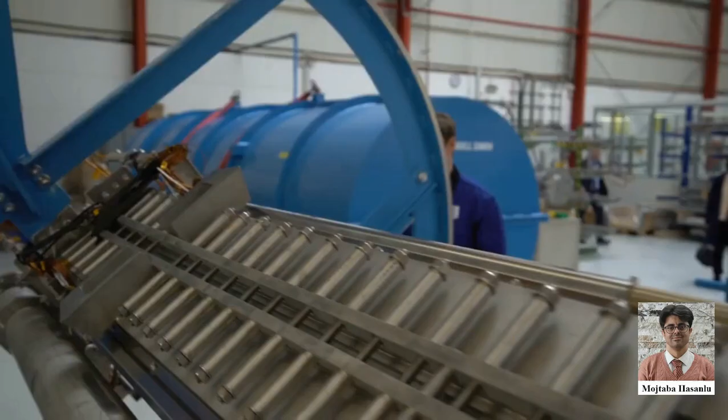While others talk about the future, we are working on it. Since 1824, Bilfinger Noell has been mastering the ever-changing challenges of our time with state-of-the-art technologies. We are a world-renowned company that focuses on building high-tech specialized machines and systems. One of the latest innovations: intelligent structural health monitoring for permanent safety monitoring of bridges.

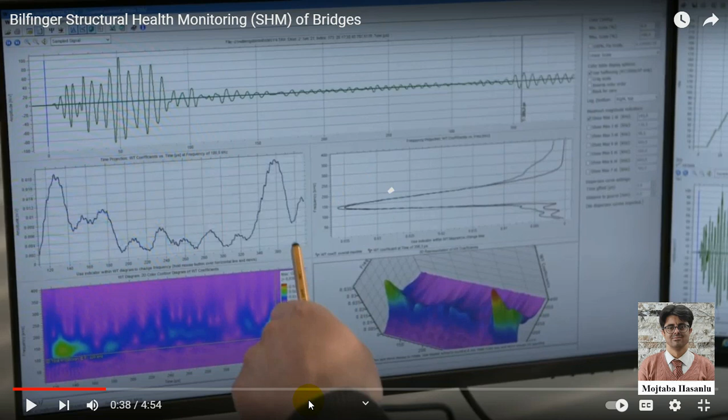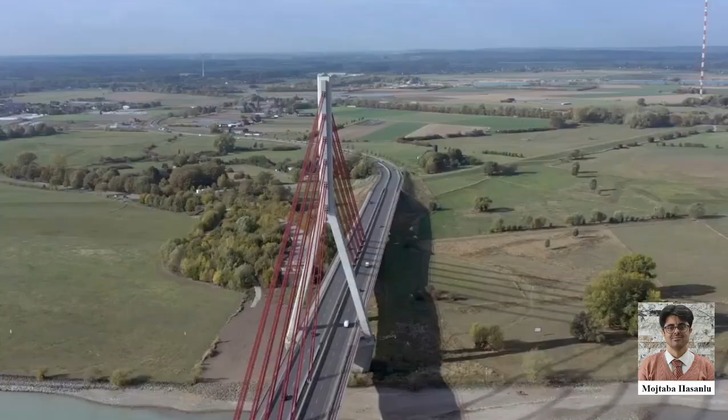Germany has around 40,000 highway bridges. About 1 out of 8 is approaching the end of its originally planned service life. It often takes years to build a new bridge. Until then, traffic authorities have to strengthen monitoring and maintenance activities.

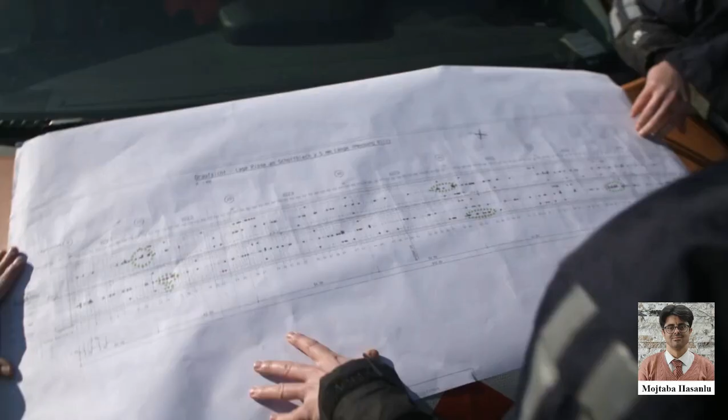Hessen Mobil, the operator of the Tal-Albach Bridge, approached us with the task to non-destructively monitor a complex building structure. We accepted the challenge and installed a monitoring system.

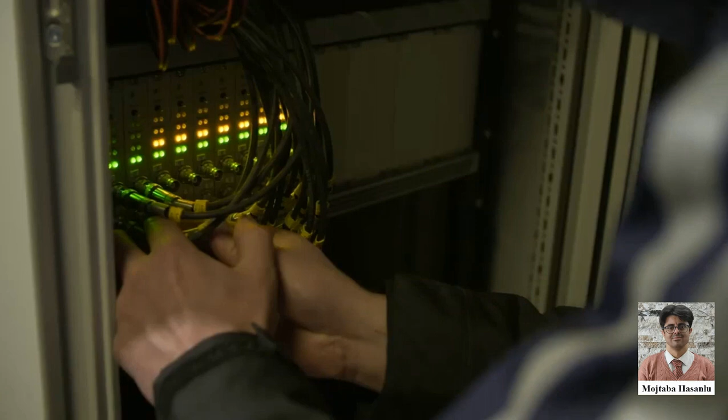An investment that pays off in the long term. After successful commissioning, the Bilfinger Noell Structural Health Monitoring System will now be monitoring the bridge structure for several years to come, reliably and around the clock. The timely detection of damage enables operators to plan maintenance measures ahead.

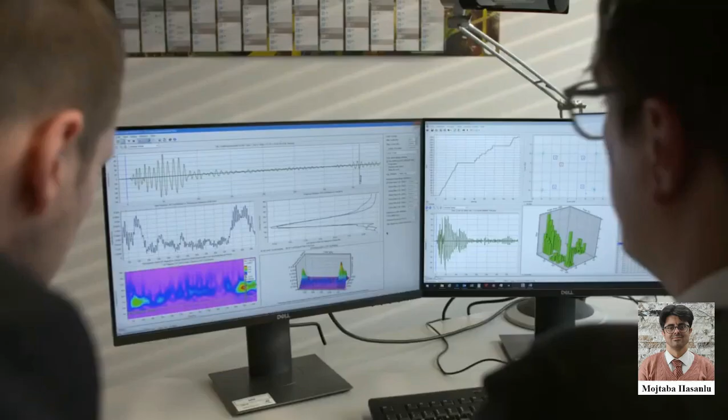In the past, our company had a lot to do with bridge construction. We were founded in 1824. From 1879 to 1979, roughly 100 years, Noell built a lot of bridges, totaling more than 1,000.

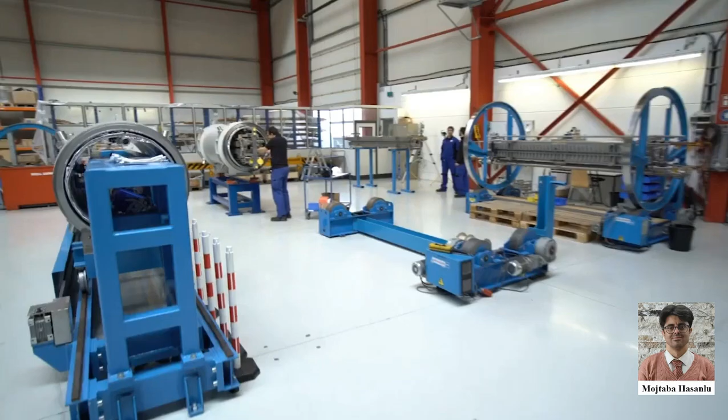We are once again working largely on bridges. By using non-destructive testing technologies, we learn about the condition of bridge structures. A proud history of bridge building, precise materials research, and broad technological expertise. Bilfinger Noell has acquired unique know-how and an extensive knowledge base, a stable foundation for applying the state-of-the-art bridge monitoring system.

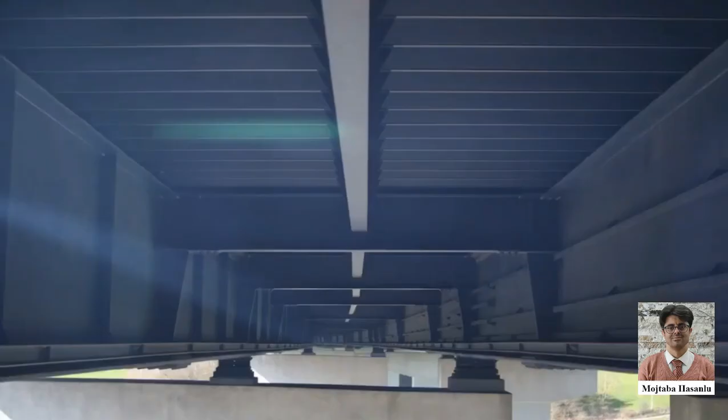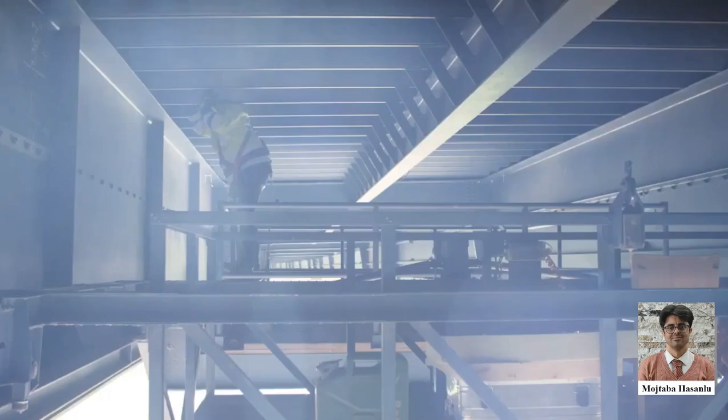Conventional bridge inspections are visual inspections. The inspector has to check each weld seam individually. In addition, the conventional visual inspection only records the current status.

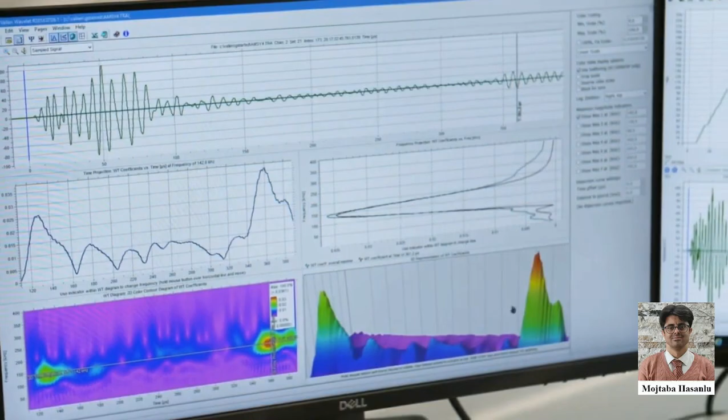Huge amounts of data are analyzed, interpreted, and visualized right when they are created, enabling traffic authorities to make the right decisions.

The great thing is that we can connect to the system, such as a bridge or a machine, without having to interrupt the process. We can listen passively, so to speak.

It is clear that there will be further applications for other types of bridges, railway bridges, highway bridges, and so on. It will also cover tunnels, other building structures, and of course we can also listen to machines and other possible things.

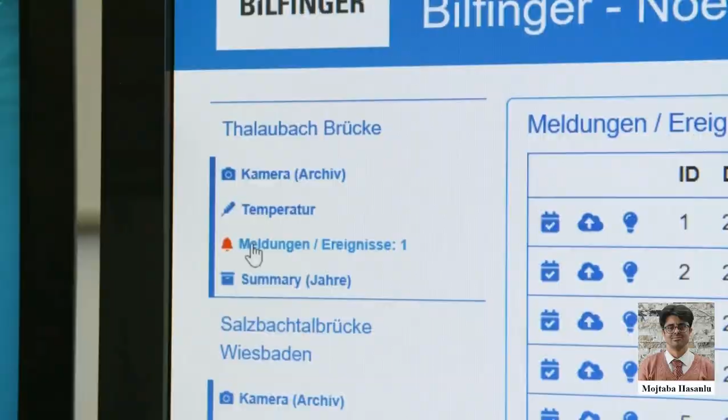Road users and operators benefit in every aspect, whether from a safe extension of the service life of the bridge, the strategic planning of the maintenance work, and thus reducing traffic restrictions, or the system's alarm feature. All this is part of a monitoring system that does not require any complicated structural adaptations. A real improvement for bridge operators, thanks to Bilfinger-Noell's structural health monitoring.

I'm Mahadevan, the John R. Murray Senior Professor of Engineering here at Vanderbilt.

Obviously, if you're concerned about reliability and risk analysis, it's not just a one-time thing at the beginning of the life of the system, but it's something that you...

Let's face it, the way we keep track of our health these days is kind of like driving a car whose dashboard only works 1 hour a year. That is literally the model of the annual checkup. Even Star Trek saw a better way over 50 years ago: pervasive, comprehensive monitoring of what's really going on with you right now. We're on the cusp of that.

The Omron Heart Guide is the FDA's first ever approved blood pressure machine that fits around your wrist. It's in its final FDA approval phase right now, going to market end of 2018. No prescription required.

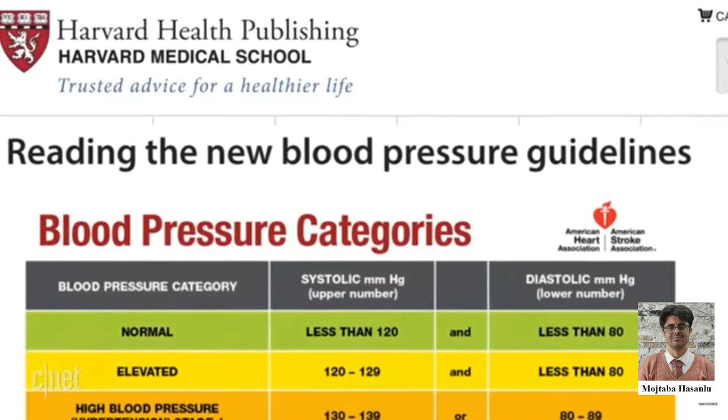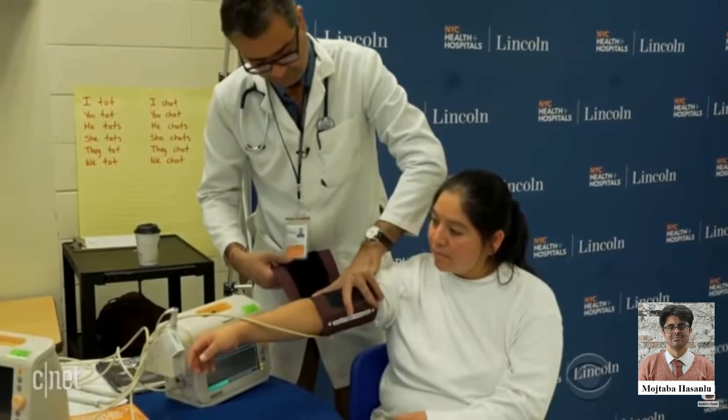New blood pressure guidelines issued in late 2017 now mean that 46% of Americans have high blood pressure, according to the American Heart Association. That's up from 32% under the old, decades-old standard. The maladies high blood pressure leads to are almost too numerous to count, but they don't call it the silent killer just to be dramatic. That should tell you something.

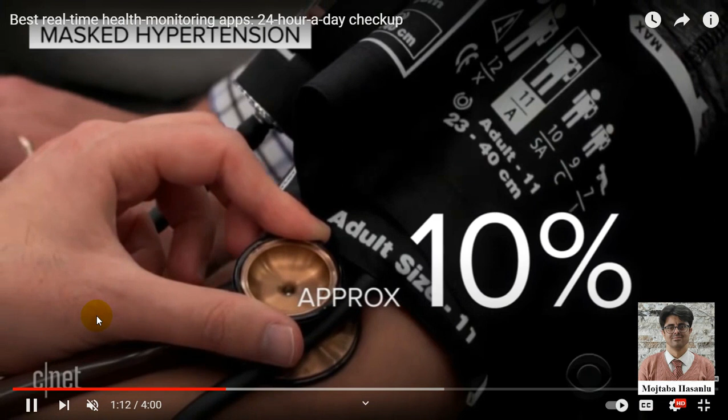The rest of the time, only constant monitoring can suss these two out.

Now let's turn to a little bit of sugar. The Dexcom G6 is the latest of continuous glucose monitors, knowing what your blood sugar levels are all the time. You wear it for 10 days at a time and simply swipe your smartphone or a small dedicated reader over the thing to check or record your glucose momentarily, to build a history, or to alert family, friends, or clinicians about a crisis level you might be in. The Medtronic Guardian Connect and the Abbott Freestyle Libre round out this hot category, and all are aimed at the idea that non-diabetics will one day wear something like this to avoid becoming type 2 diabetics.

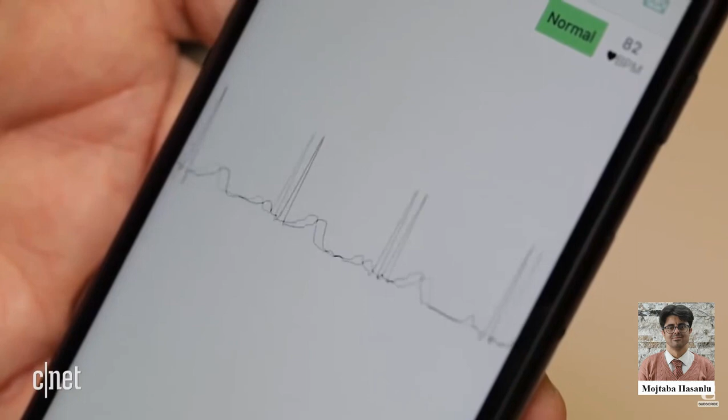Now, check out the AliveCor KardiaBand, a band for an Apple Watch, but it's actually a wrist-worn electrocardiogram machine. It's specifically designed to detect atrial fibrillation. That's when your heart kind of flutters instead of beating smoothly. And it's a key contributor to the future risk of stroke. This band is said to be about 87% accurate at detecting AFib. And like other products we've looked at, it's FDA cleared.

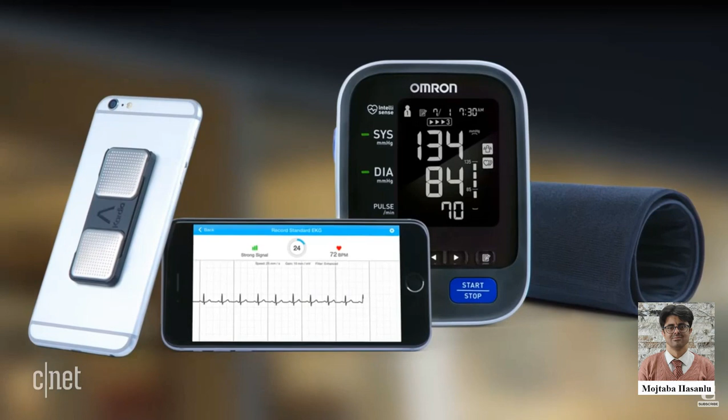AliveCor and Omron, who we just saw, work together. Their products can already create a single channel of information about your heart health for you or the clinician who would like to see it when something is outside the realm of normal.

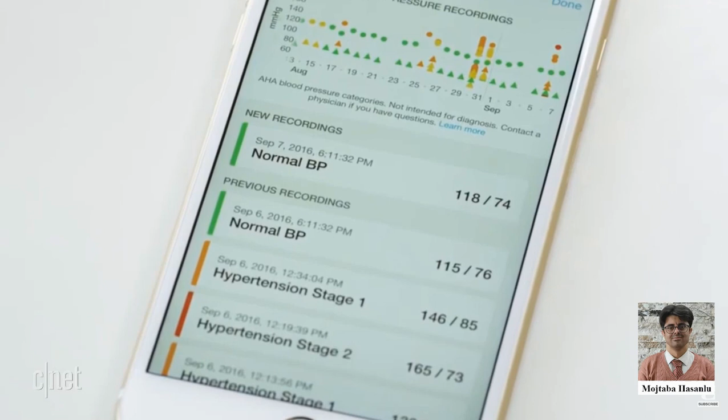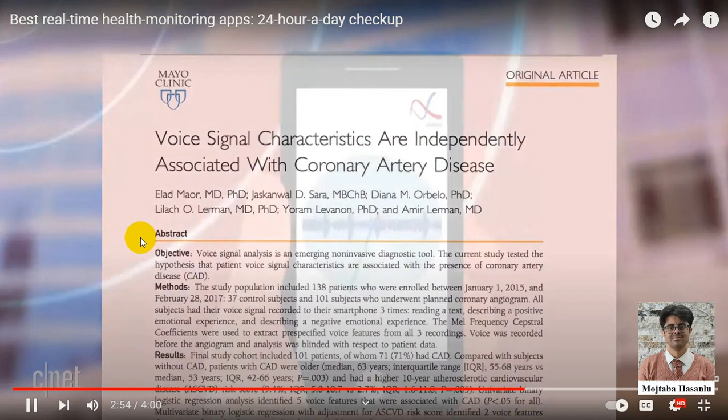Evidence suggests that your voice may be an accurate indicator of whether you have coronary artery disease. 81 tonal features of voice were measured after patients spoke to a recording app using technology from a vocal biomarker company called Beyond Verbal. Upon further confirmation, this study could open the door to you monitoring your circulatory system by just talking.

Where does all this go next? First, these devices need to give us answers, not just information, and answers that motivate rather than overwhelm or discourage us. Secondly, it'd be great to have a single dashboard of our health from many sensors, hopefully without us having to wear many devices. Third, make these technologies over-the-counter so we can wear them long before we supposedly need them. This does, however, set up some tension between devices that keep us well and pharmaceuticals that fix us when we're not. And fourth, recognize that everything is a health signal, from your smart home devices to your social graph.

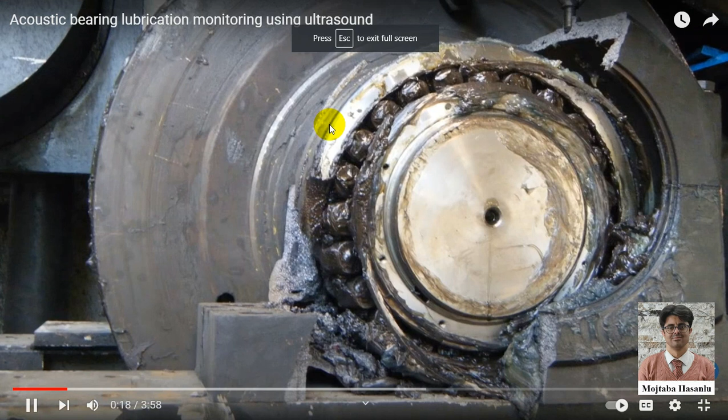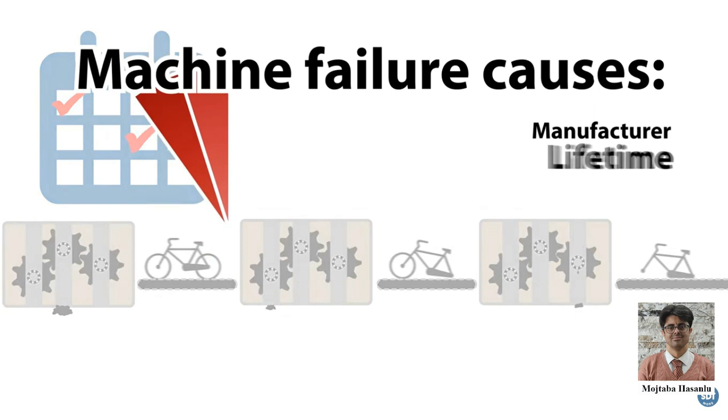Ignore simple concepts like appropriate lubrication and pay consequences that undermine your competitive advantage. Poorly lubricated bearings are a primary contributor of premature machinery failure. A common mistake is to grease bearings based on time intervals instead of condition. This wastes time and lubricant and contributes to over-lubrication. Major bearing manufacturers claim that incorrect lubrication practices decrease the longevity of bearings by as much as 40%.

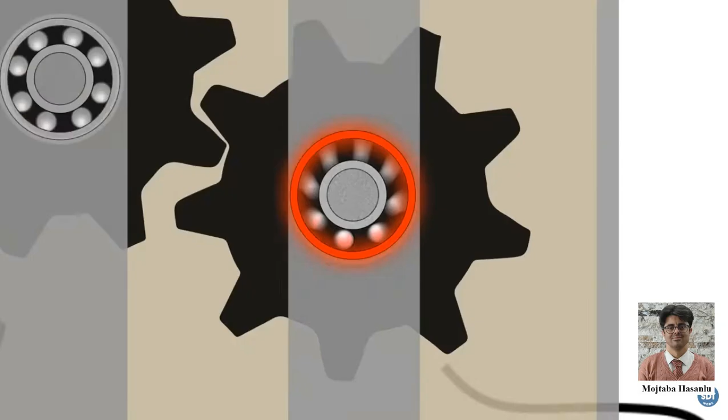Grease serves a simple purpose: to reduce friction and dissipate heat. Too much lubricant builds pressure inside the bearings. Too little creates excessive friction and heat. The result? Bearing fatigue, overheating, failure, and excessive energy consumption.

Companies looking to optimize lubrication practices have adopted a conditional approach. By monitoring the friction levels of bearings with ultrasound, they can determine when the lubricant has deteriorated and needs replacement. Trending against an established decibel value, increased friction levels are quickly spotted and alarms triggered. It becomes a standard practice to sort good bearings from those that require the attention of the lubrication technician.

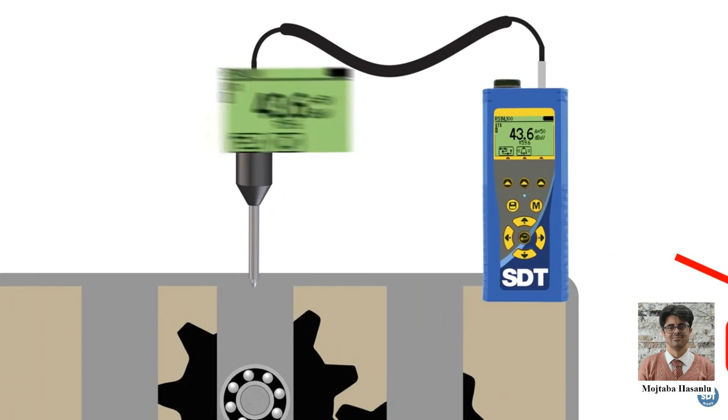Data collection is simple and not time-consuming at all. Diagnosis is straightforward, allowing intervention well in advance of failure. The SDT270 ultrasound detector from SDT serves a dual purpose. In addition to alarming when friction levels need attention, lube techs listen to the bearing as new grease is applied.

Using the SDT270's digital decibel metering as a guide, only enough grease is applied to return the bearing's friction level to normal. One stroke of grease more, and the damage of over-greasing enters the equation. Another common mistake everyone makes.

There are three rules to follow for optimizing bearing lubrication. First, don't grease bearings based on time and service. Grease them because friction levels have started to increase, a sure sign that the lubricant is failing. Don't use listen-only ultrasound devices. Measuring friction levels requires the accuracy and repeatability of the digital SDT270 ultrasonic data collector. Whether predicting greasing intervals or actually applying new lubricant, it depends on the precision of SDT's digital decibel display to avoid over and under lubrication. Are you new to the concept of ultrasound-assisted lubrication?

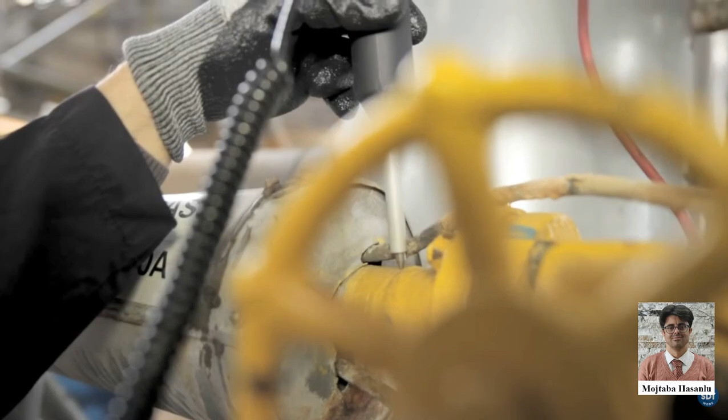There are lots of things you can do with an ultrasound program. Acoustic bearing lubrication monitoring in real time is just the beginning. Our promise to you is that no matter what your ultrasound goals may be, SDT will be right there beside you each and every step of your journey. So what are you waiting for? Let's hear more together today.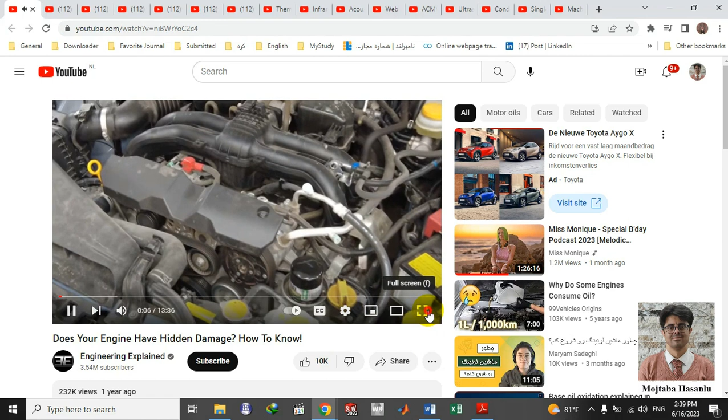How you can determine if your engine has hidden damage. And to do so, I've taken oil samples from my engine after a 3,000-mile road trip. The purpose of this video is to help show what you can learn about your engine and vehicle by having an oil analysis performed. There's actually a surprising amount of information these have, and it even brought up some red flags for my own car.

Now, it's worth mentioning, 3,000 miles is not a lot for modern engine oils. This video isn't about when you should be changing your engine oil. I'd recommend consulting your owner's manual for that information. Instead, we're talking about what we can learn with an oil analysis.

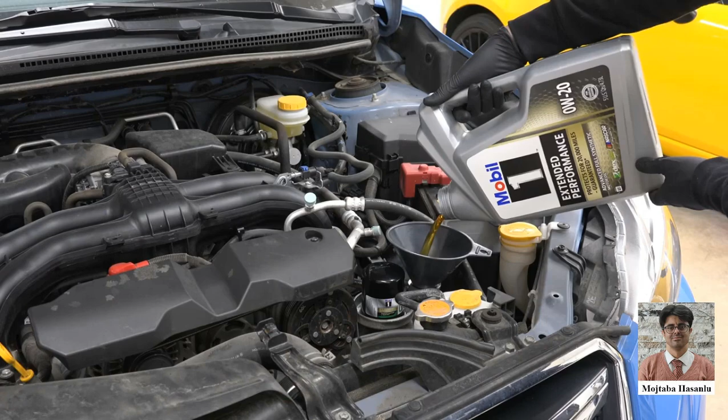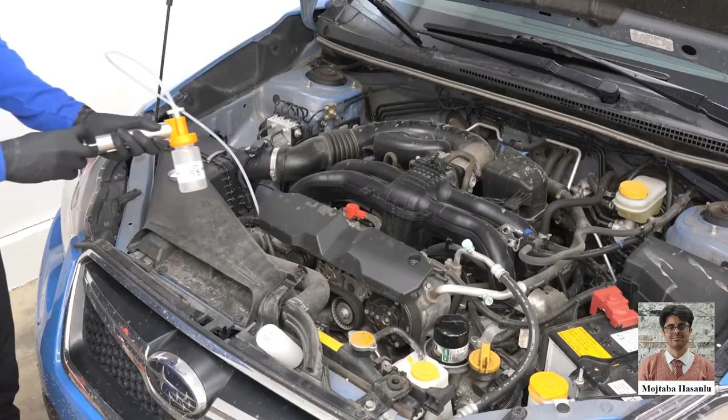So for this test, I took 12 total samples at 3 different intervals for my Crosstrek. We start off with fresh oil right out of the bottle, took a sample of that, then put that oil in after changing the oil in my Crosstrek, let it idle for 15 minutes, and then I took another sample. This makes sure anything that was left behind in that engine, we know what our starting point is with the fresh oil in there. And then after driving 3,000 miles, I took the final sample. So we've got our before and after with these 3 samples.

To get those 3,000 miles, I did a nice scenic road trip and checked out the Grand Tetons as well as Yellowstone National Park, and a bear was kind enough to check in on our mileage count about halfway through. I happily reported to the bear progress was going well.

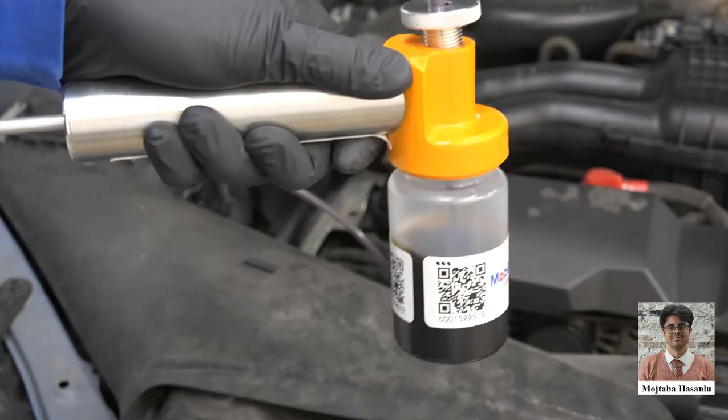So at each of these intervals—new, 15 minutes of idling, and after 3,000 miles—I took 4 samples. I sent out a set of samples to Mobil 1, and because this video is sponsored by Mobil 1, I sent out another set of samples to a third-party lab to independently verify the results. I also took a backup sample at each interval, and that's the samples you see in front of me here, just in case any of these were to get lost in the mail, so I could have another option to send out.

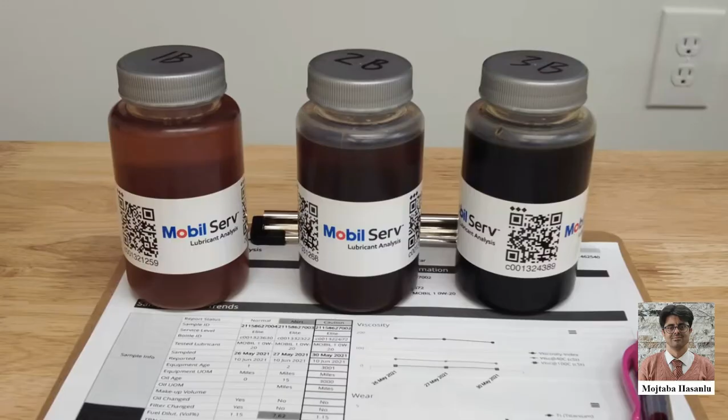So what can we learn from an oil analysis? Well, I spoke with Mobil 1 engineers who manage the oil analysis for large trucking fleets, and they told me how they go through one of these sheets to look at information regarding your engine's health, as well as how much remaining life you have within your engine oil. We'll go through this based on 4 main themes.

First, what's our engine health? Second, what's our oil health? Third, how did the third-party lab results compare? And fourth, what were the red flags that came up for my car? Starting with engine health, Mobil 1 engineers stated the first things they look at on an analysis are the wear and contaminant blocks. Both of these blocks are measured in parts per million, or ppm, meaning the quantity of these metals present out of a sample of 1 million parts.

As we look at the data throughout this video, note that the first column represents the first oil sample, fresh oil, the second column represents the second sample after 15 minutes of idling, and the third column represents the third sample after 3,000 miles of driving.

Worth mentioning, molybdenum is present in the oil itself, so you're looking to see if there's a significant increase. With all the other metals, the starting point is essentially 0, and if you see a significant increase, it can be indicative of certain engine components wearing. For example,

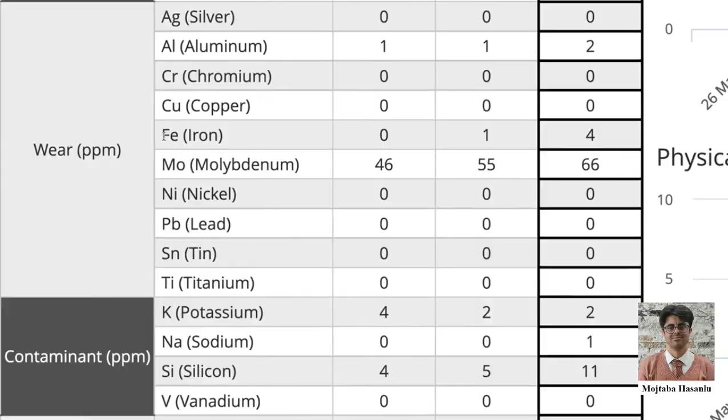a spike in aluminum could mean piston, block, or cylinder head wear. Copper could mean worn bearings, iron could mean worn cylinders, crankshaft, or camshafts, and I've provided a fairly generalized list of what certain metals could mean for how engine components are performing.

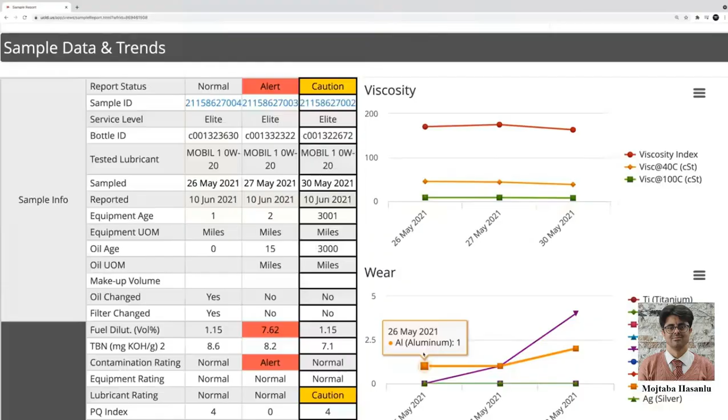The only and very slight increase on wear metals from the Mobil 1 analysis was iron at 4 ppm starting at 0, not enough for it to actually matter yet, and that matches with the third-party results for both aluminum at 2 ppm and iron at 4 ppm after 3,000 miles.

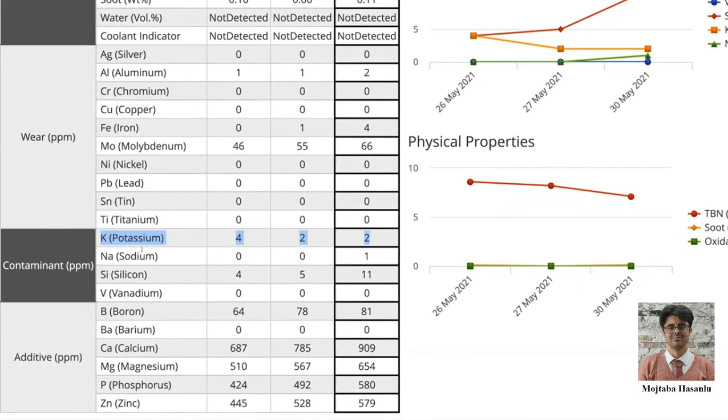Aside from wear metals, the other part of engine health is looking at contaminants. Potassium and sodium can be introduced through the engine coolant. Seeing a noticeable spike here could mean that engine coolant is making its way into the engine oil, and this could be indicative of a head gasket failure.

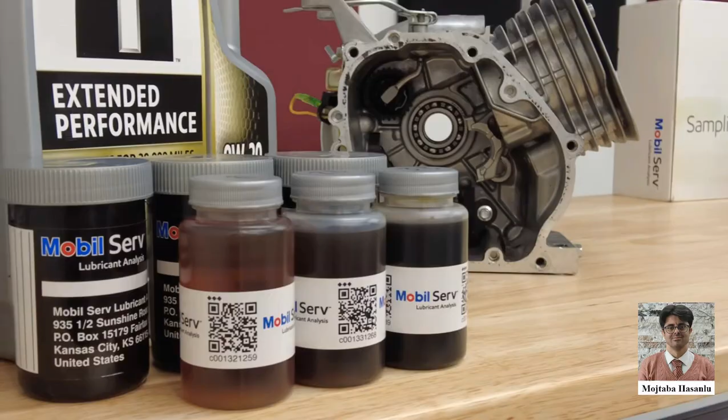Mobil 1 says if this number is over about 75 parts per million, that's when you want to start being concerned. The good news is for my engine, it was well below that.

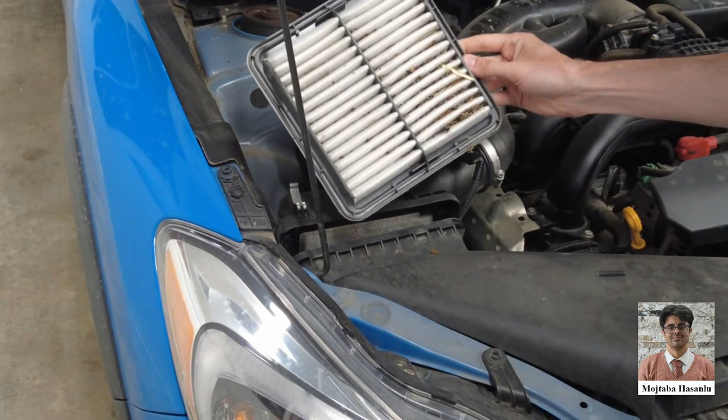Silicon, which will commonly come from sand or dirt ingress into the oil, can help indicate how well the air filter is functioning. This is a particularly important metric to focus on if you're running an aftermarket air filter, which might not filter out contaminants as well as an OE filter.

Silicon is very hard and abrasive, so if you get a significant amount of it in your oil, it starts to chew up your engine internals.

In speaking with a company that operates in the rally space, they said their biggest challenge was finding air filters that could properly hold out dirt from getting in the engine, which then chews up the cylinder liners, you start to get lots of blow-by and oil consumption, and ultimately ruin the engines.

Silicon can also come from RTV, an engine sealant used in assembly.

And finally, regarding engine wear, Mobil 1 reiterated the importance of changing out your oil early on the very first time when you're breaking in that engine, to make sure those initial contaminants and wear metals that are present when the engine is being built are removed quickly and taken out from that initial break-in period.

It's not the synthetic versus conventional debate that's important for break-in, though I use synthetic for my cars, but rather that you change the oil early the first time to remove contaminants from the initial manufacturing and break-in period.

Now that we know the health of our engine, we want to check the health of our oil. So this lets us know whether we can continue using the engine oil or if it needs to be changed out.

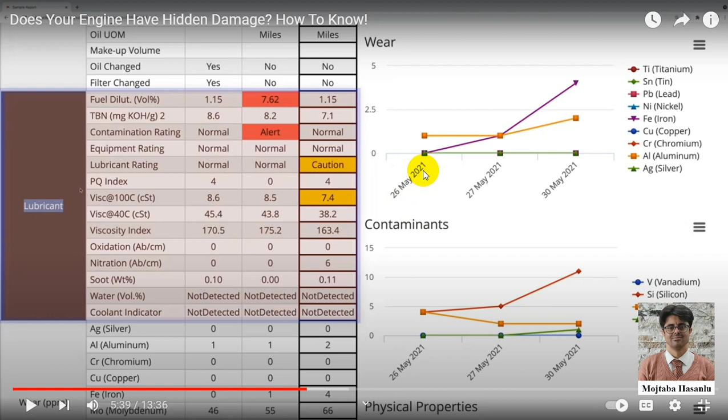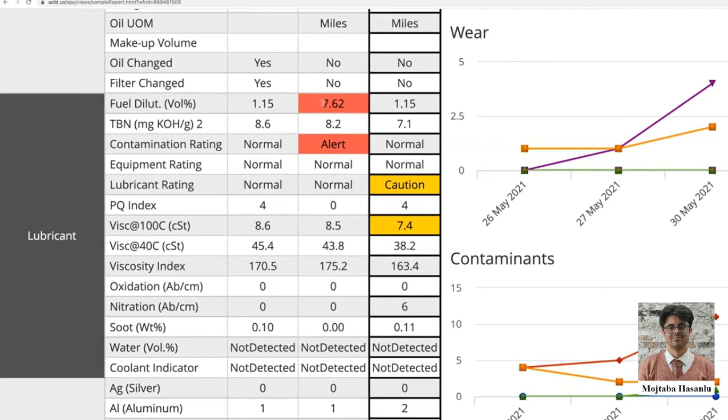The lubricant. First step is fuel dilution. Obviously, you don't want to see fuel mixing in the oil. It's a sign you're potentially running rich or have excessive blow-by, possibly a fuel leak, and this will thin out your oil. Now, I have an alert here from Mobil 1.

We'll get into the cautions at the end. But after 3,000 miles, Mobil 1 reported low fuel dilution, and the third party said no fuel showed up.

Next, we get to total base number, or TBN. So as you have combustion occurring, blow-by gets past this piston and can cause contaminants to enter within your engine oil here in the crankcase. So those contaminants can cause acids to form.

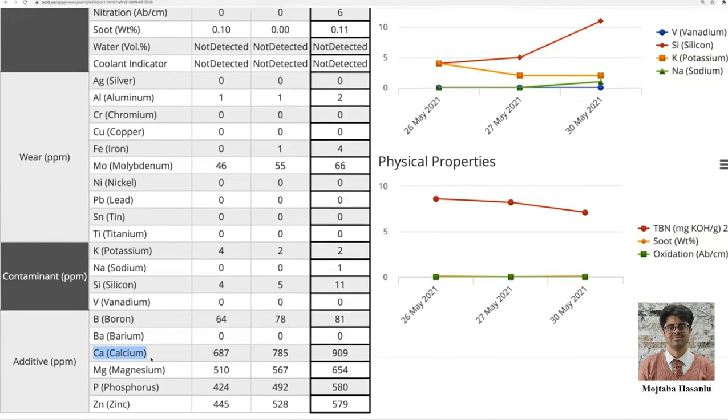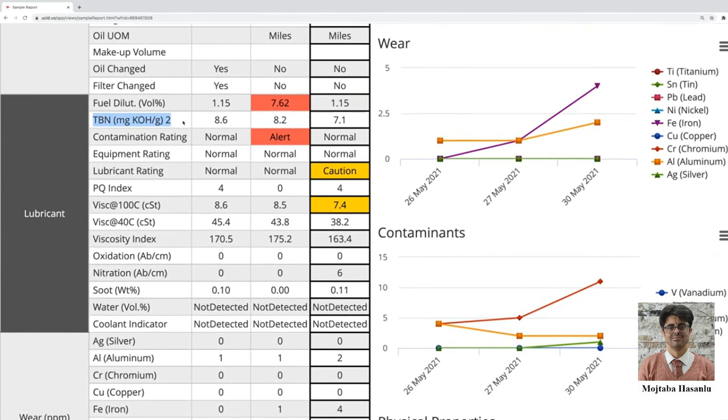To counteract acid formation, you have calcium and magnesium in the oil, as you can see is present in the additives. Calcium and magnesium neutralize these acids, so your TBN is basically telling you how much acid-fighting power the oil has left in it. As it gets lower, you need to replace the oil.

The third-party lab says you want your TBN to be above 1, and after 3,000 miles, again, not that many miles, the TBN value measured was above 1 by both Mobil 1 and measured by the third party.

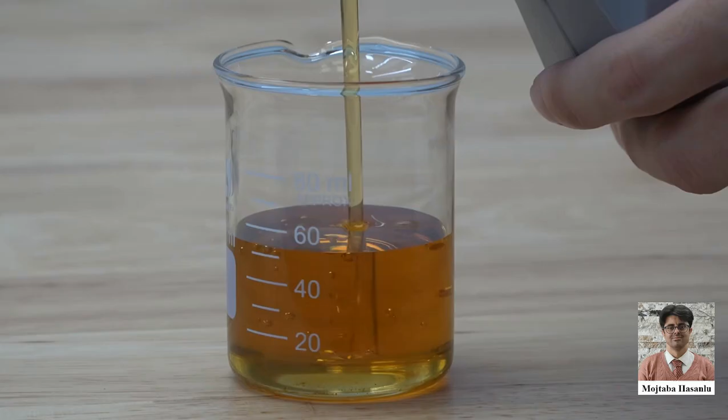Now, viscosity is obviously an important metric for motor oils. It's the big numbers you see on the side of the bottle. So in this case, at 100 degrees C, our hot rating is this SAE 20 grade. And so an SAE 20 grade oil should have a viscosity between 6.9 and 9.3 millimeters squared per second.

And our Mobil 1 results show that happening. So it's starting off at 8.6 and then ending up at 7.4. If the viscosity measurement is too low, it could be indicative of fuel or water getting into the oil. If the viscosity is too high, it's likely a result of oxidation, meaning the oil is no longer usable and needs to be changed.

Which leads us to oxidation, which is one of the biggest factors in determining the health of an oil. So oxidation is oxygen mixing with that oil and degrading it, and it's going to happen no matter what. Your goal is to simply delay this process as long as possible.

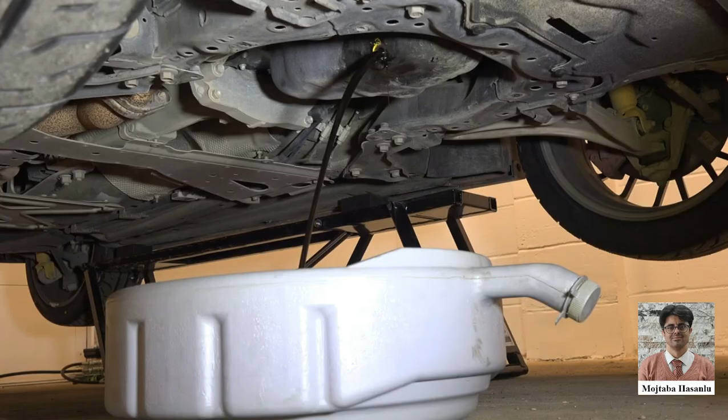Oxidation causes the oil to thicken, form sludge and deposits, and accelerates the degradation of the oil. Antioxidants are used as additives to delay this as long as possible, but once it starts happening, you'll notice the viscosity of the oil can start to change, and this can happen quickly once it starts to get bad. Obviously, you want to change your oil before it gets too thick.

In this case, after 3,000 miles, there isn't any noticeable oxidation.

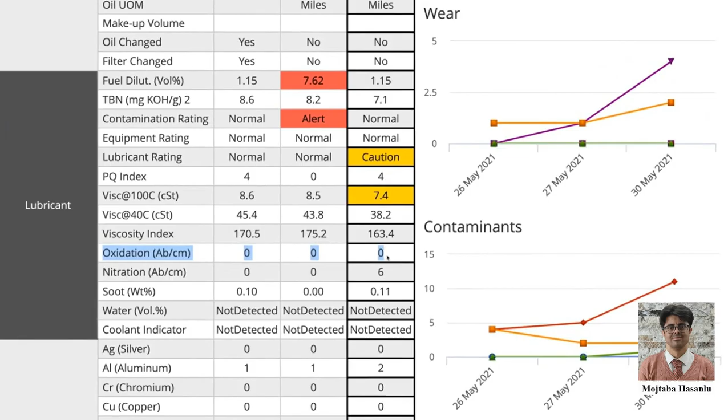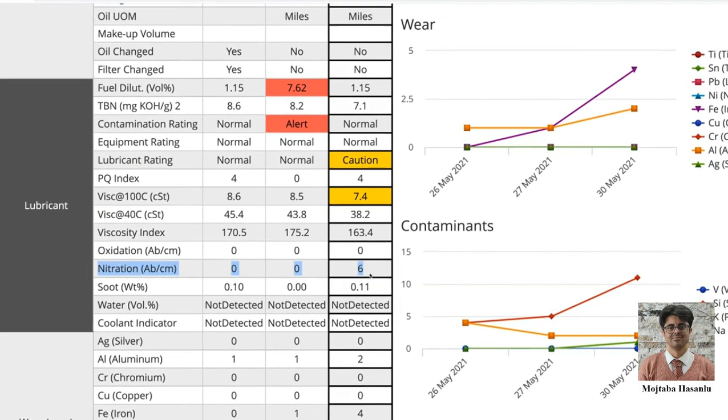Nitration is a somewhat similar idea to oxidation, except in this case, it's nitrogen that's mixing with the oil, that nitrogen coming from nitrogen oxides, which are formed during combustion, then making their way past the piston from blow-by and mixing with the oil. It causes degradation to the oil, and in this case our measurement shows a small increase in nitration, but not enough to warrant changing the oil.

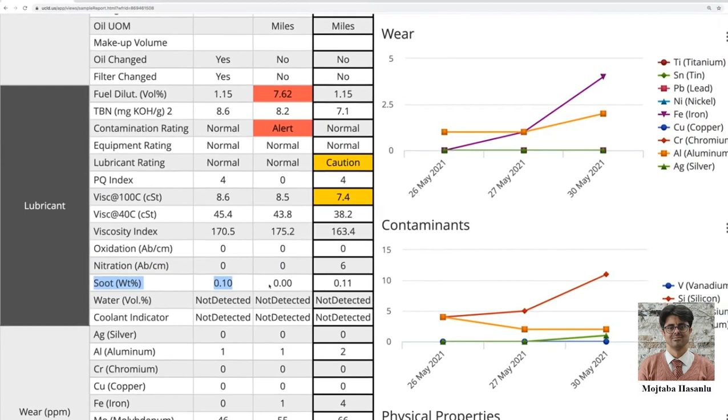Soot is a collection of carbon particles that form from incomplete combustion, and if this soot gets into the oil, it can shorten your oil filter life, and also act abrasive to the engine. Also, too much soot can overload your exhaust emissions equipment.

Since this is a port-injected gasoline engine, soot really isn't an issue, but for modern direct injection gasoline engines, as well as diesel engines, it's definitely something you want to monitor. In our case, measured levels were very low.

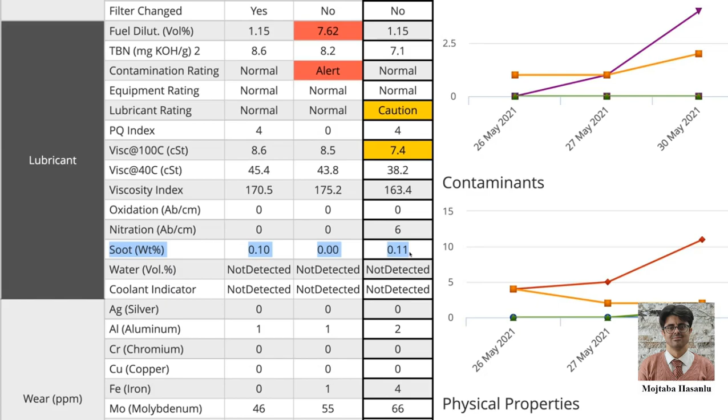Finally, you want to make sure your oil doesn't have any water or coolant content. This can reduce the oil's viscosity and thus reduce its effectiveness at protecting your engine. Thankfully, both Mobil 1 and the third-party analysis did not find any coolant or water in the oil.

Now, as mentioned, I wanted to make sure I could trust all the results, so I sent samples to 2 labs, and for the most part, both labs' results matched well.

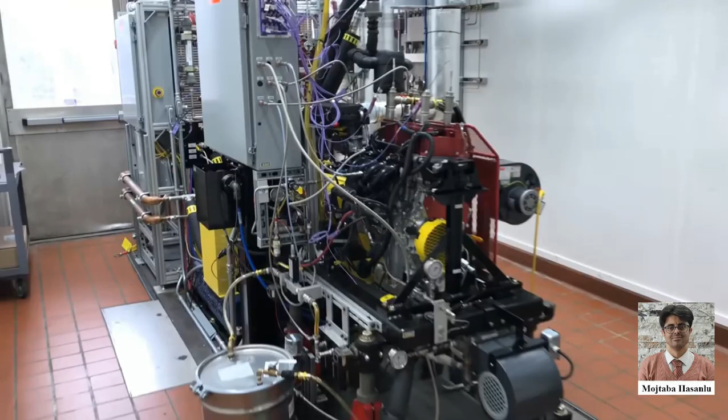The TBN is good at 7.1, so add another 2,000 to 3,000 miles to this oil. Very nice, how about that? Happy, excited oil analysis. Worth mentioning, third-party labs don't know what type of oil you're using, so they're unlikely to recommend a change interval longer than the manufacturer recommendation. Mobil 1's testing has shown these oils can last as long as 20,000 miles, and I have a video showing the validation testing involved of a long-life oil if you're interested in checking it out.

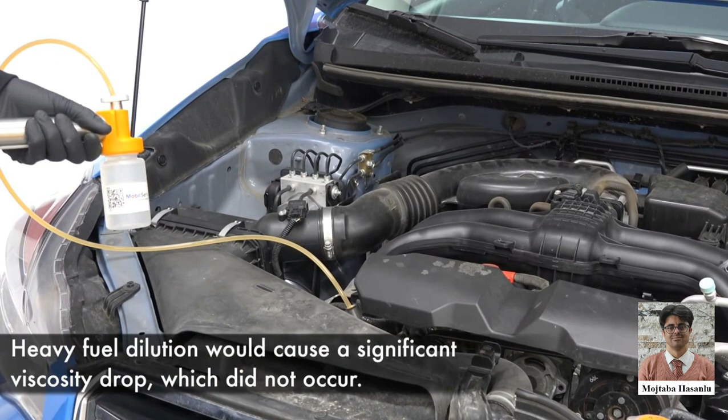Now, that is not to say that there were not any cautions brought up. Mobil 1 had two things that they noted to be concerning. First of which was fuel dilution as a percentage of volume at 7.62%. So that is pretty significant, all things considered. Now, this was after just 15 minutes of idling. So the engine was cold, it idled for 15 minutes warming itself up before I took that sample, but it says the fuel dilution was 7.6%. So if there was that much extra fuel being dumped into the cylinders and then making its way into the oil, I think there would be other signs that that was occurring.

So it may just be that this was a misleading data point. Either way, at the 3,000 mile mark, the fuel dilution was not anywhere near what that measurement was, and so neither the third-party lab nor Mobil 1 saw a significant amount of fuel in the oil at that 3,000 mile mark, so I don't think that one needs much concern.

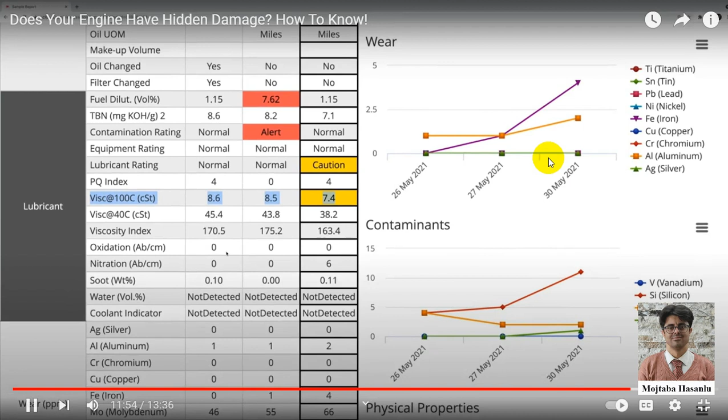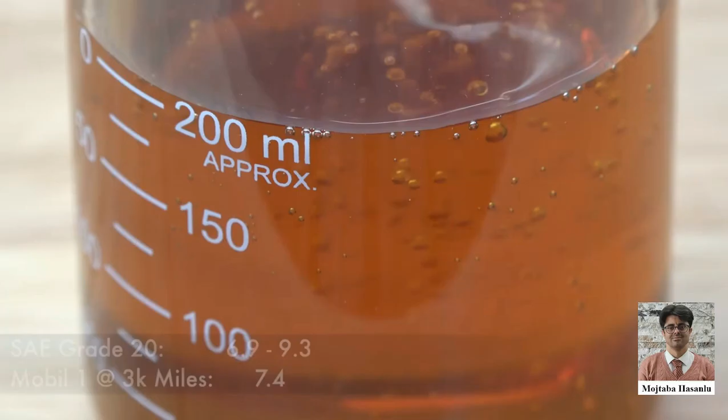There was one more caution from Mobil 1 in the oil viscosity. Mobil 1 measured this at 7.4 and the third party at 7.31, so similar results after 3,000 miles. Now, you could expect to see a small drop in viscosity from shearing viscosity modifiers. These are large molecules that are additives, and if you break up these large molecules, then you're decreasing your viscosity. The important thing is you don't want to see the oil fall out of its SAE viscosity grade, and in this case, it does not.

Speaking with Mobil 1, they believe the initial viscosity drop is normal, where the viscosity will then plateau and then slowly increase in viscosity as it reaches the oil's end of life. So while this is generally expected behavior, I did take a look at some of the potential causes for a viscosity drop just to make sure everything looked in order.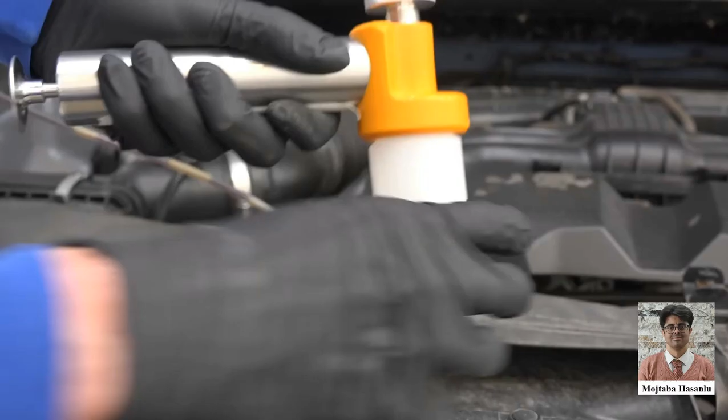It could be that the fuel injectors are leaking or running a bit rich, and fuel is getting into the oil slowly, decreasing the viscosity. That said, I have checked my fuel trims and air-fuel ratios, and things seem to be normal. And I don't have any engine codes, so it's something to continue monitoring. With more samples and more analysis, it's something I can figure out if it's actually the beginning of a real problem or nothing to be concerned with.

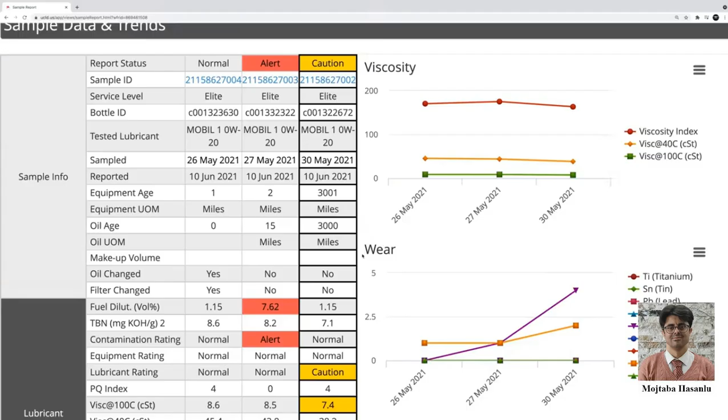And that's kind of the whole point of this oil analysis, right? You're looking at the health of your engine, the health of your engine oil, and you're monitoring things so that you can catch things before they become more serious problems. You can look into things and make sure, hey, my engine health is good, everything's going as planned, or if things pop up, address them as needed.

So this was my first time doing an oil analysis, and I found it quite fascinating. So I hope you enjoyed learning about this as well. If you have any questions or comments, feel free.

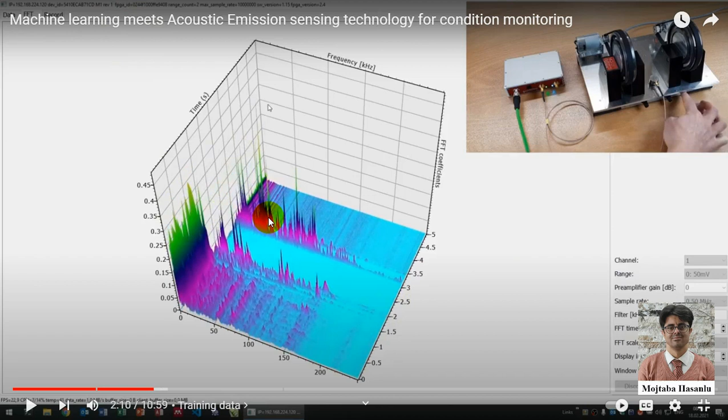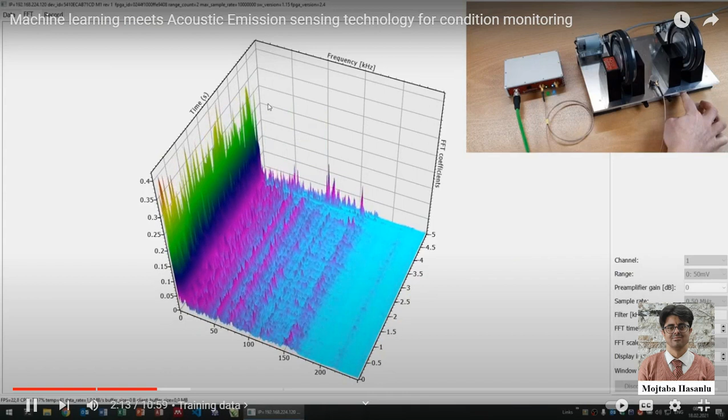Based on the differences in the frequency range, a model can be trained to distinguish between the intact and defective bearing. For this purpose, training data of approximately 2 minutes is recorded from each bearing.

Since a defective bearing can already be detected via the sound level, the rotational speeds of both bearings are adjusted to such an extent that a separation of the bearing conditions is only possible via the spectral properties. The training data are stored in 2 different measurement datasets, OK and not OK.

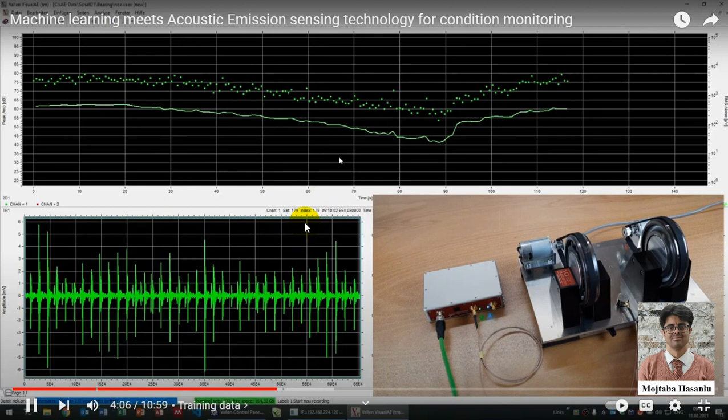The classification model is trained with VisualClass. For this purpose, a new project is created and the various measurement datasets of the classes OK and not OK are specified as training data.

Spectral characteristics or features are now extracted from this data. At this point, only a rough outline of the workflow is presented.

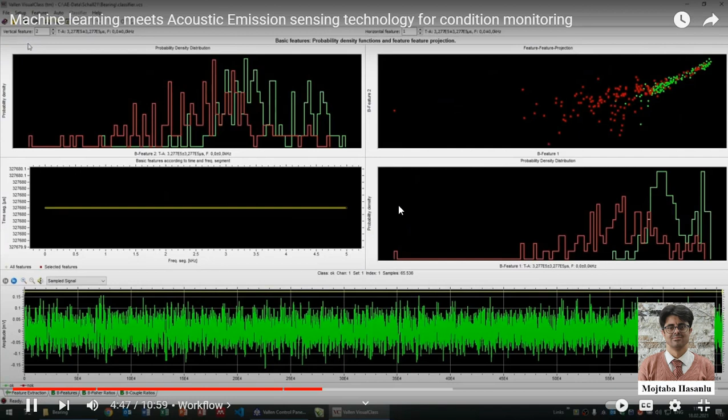Each feature on its own still shows a strong overlap of the classes OK and not OK. However, a higher selectivity can be achieved through a systematic combination and transformation of features.

The next step is the feature selection. At this stage, the features are evaluated and selected according to their separability. The top 50 features are selected as a first attempt.

The final step is the actual training of the model based on the extracted and selected features. The classification accuracy with previously unseen test data lies at 95.8%.

As anticipated, the classes, here green OK and red not OK, can be easily separated due to the selected and transformed features.

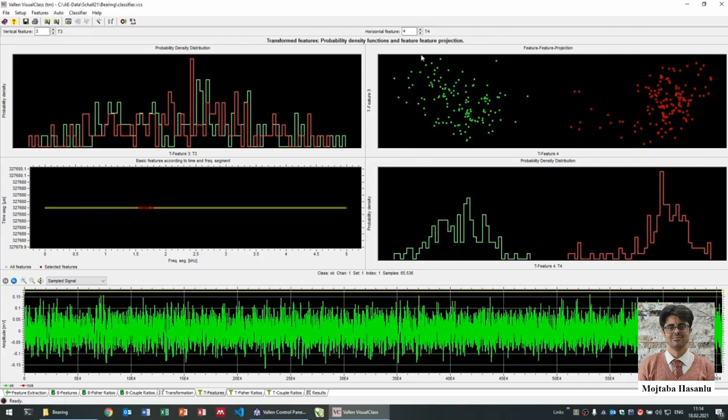With the help of an automatic parameter search, the settings of the feature extraction as well as the selection can be optimized. Here, you can see how the number of features is automatically optimized. The aim is to maximize classification accuracy in the test data and avoid overfitting the model.

After optimization, a classification accuracy of 96.9% is achieved on the test data. The model can then be exported with the optimized parameters.

With the exported model, new unknown data from rolling bearing measurements can be classified offline as well as in real time. To do this, we start a new measurement.

For the current acquisition, the feature extractor is also started, which receives a link to the current measurement file as well as the exported model.

As soon as a new dataset is recorded, the features for it are extracted, selected, transformed, and the classification result calculated.

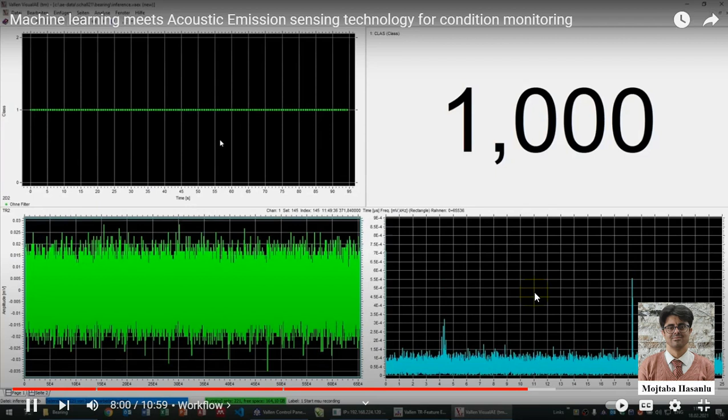Despite the standstill of the bearings, class 1 is displayed as OK. Why is that? We have created a classification model that can only distinguish between two states, OK and not OK.

The stationary state is unknown. Even if the state is far from the known state, the classifier must decide on a class.

A possible solution is to train the stationary bearings as another class, hence the noise of the measurement chain and possible ambient noise. However, since the state differs so much from the operational bearings, a simple RMS threshold, for example, may be sufficient.

For this purpose, we implement a short upstream logic that classifies all datasets with RMS values smaller than 20 microvolts as standstill or class 0.

For larger RMS values, the result is given by the classifier. Now, the stationary state is correctly displayed as class 0.